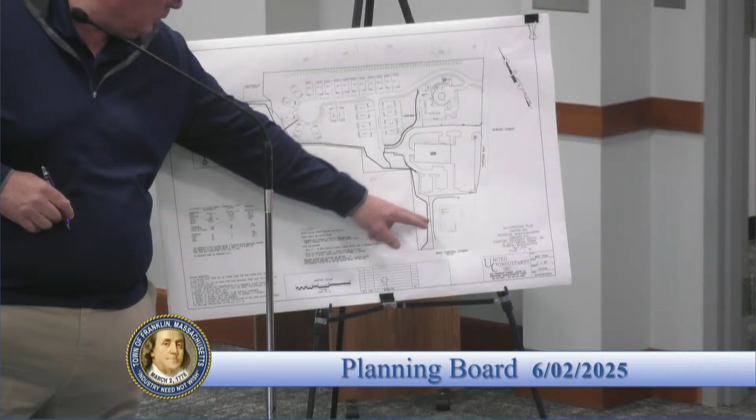But the rest of it, from a surface and grading standpoint, wouldn't provide the same accessibility that a sidewalk provides to seniors or people with a stroller. Or would it be a possibility to eliminate this section of trail and relocate the sidewalk along the street instead?

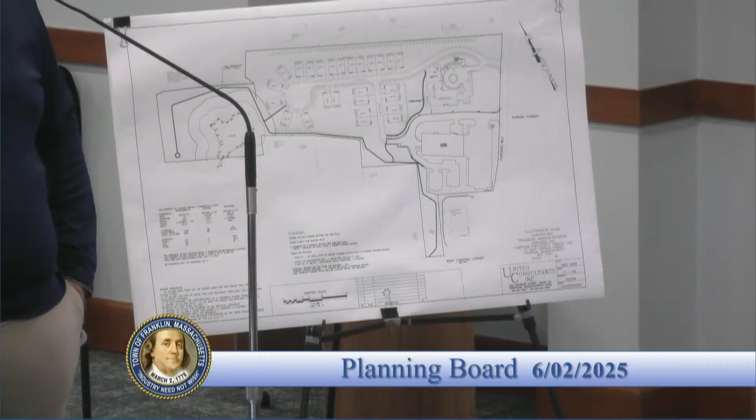I think it's a weight between what the planning board and what's more important - do you want a trail or do you want a sidewalk? Cost-wise for you guys, both would be ideal, right?

I'd like to hear what everyone else is thinking on that one. I can go either way. Jay? So, yeah, I get the sidewalk thing.

Not to get too pedantic about the sidewalk, but as soon as you start messing with the sidewalk over there, as Mike acknowledged, the road is kind of beat up, and you get into what the heck's gonna happen with the road. You might end up with a situation where the road falls apart, or we create a drainage problem we're not currently aware of.

So it's not super easy, and I'd like to, before we put something definitive on the developer, have some level of commitment from the town that there would be a partnership. I was trying to do the math quickly - it's probably like $120,000 to put that sidewalk in. That's a lot of money to just go and pitch at someone without some level of commitment from the municipality, because sidewalks and curbing open cans of worms.

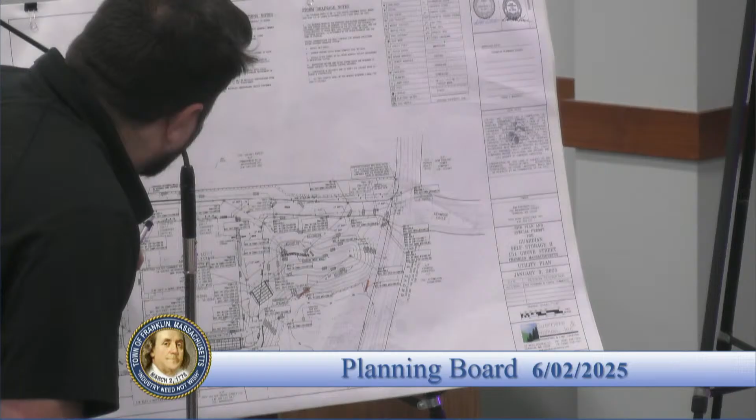And then, we are doing some replanting with conservation seed mixes on side slopes after the fact, so that they'll reestablish themselves as kind of a wooded or non-maintained lawn. It'll be allowed to go back to a natural state.

To that side and to the rear also? Yeah, wherever we can, that doesn't interfere with drainage infrastructure.

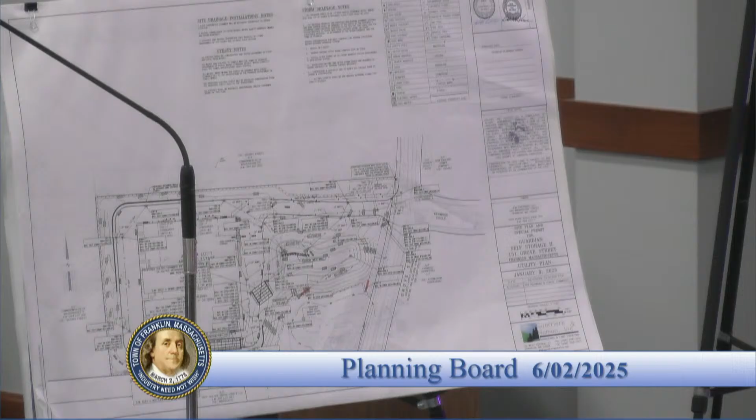All right, thank you. I actually have another question. Mike, if or when the town does sidewalk improvements over there, is it a fair assumption that it's gonna be a continuation of the 8-foot wide bike path? That was the original idea at the time when we were doing that first phase, to eventually extend that all the way up to the intersection of Beaver and eventually get access to Beaver Pond. Yep, that was the grand scheme of things.

Okay, so assuming that's the continuation of that, I'm guessing here, but based on my understanding of the alignment of that roadway, you'll probably have to shift the curb out at this location to accomplish that. Possibly, yeah.

I'm thinking it's gonna go that way, so you're gonna end up narrowing the road, you'll reduce the effective speed on the road, and then it'll actually improve your sight distance situation, so I think this might be a temporary issue. I'm trying to come to some level of comfort with it. I'm usually a pretty big stickler about that one. So having that in the back of our minds, combined with lighting that up, kind of puts me at ease.

Anybody in the audience? Comments, questions? Anybody on, no, none on? Okay.

I concur with the rest of the board, and I do think, I like Jay's idea, the additional light at the entry. I think that'll only help this site as well as across the street. I don't know if there's a street light across the street. I don't think it is. I think it's offset down the street. No, I don't think it's directed. It's not a well-lit intersection. It's probably mostly offset, I would say. And then basically you're taking care of the clearing at the front entry, so I'm okay with that.

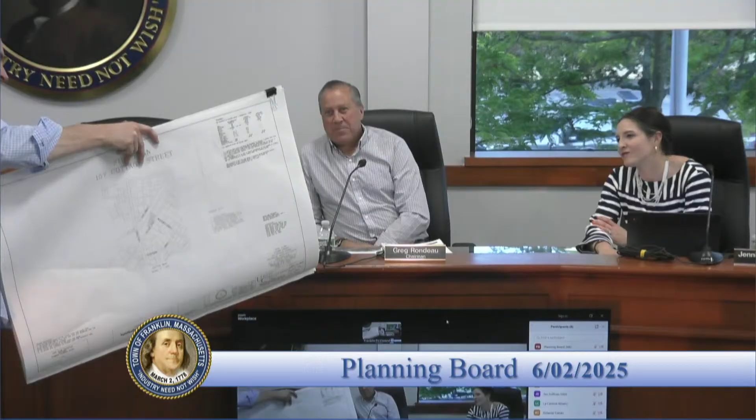So here's the building, there are two poles. On the right side of the building there's an existing pole right across the street. And there's another pole on the left side of the building, right there. If you look at my pictures, this is looking down towards the intersection of Union Street - that's the pole on the left side. And if you flip around the other way, that's the pole that comes across from Manchester Street.

So it's not proposing any new poles, those are two pre-existing poles, basically on the left and right side.

I went out there and measured everything with a foot candle meter. At the bottom of the poles there's about 0.9 or 1 foot candle, and it spreads out toward the middle. Anything on this plan that's spilling out, worst case, is 0.3 to 0.4 right at the middle. All the other stuff is 0.1, so that spillage is way less than the existing spillage.

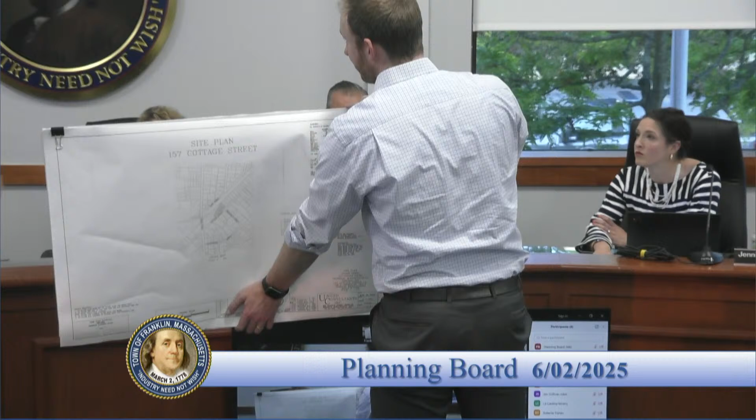Point out where your nearest residence is. There's one here which gets no light spillage whatsoever, and the other is just across the street. You can tell it's very dark - even the light poles don't make it across the street. There's a house here and a house here, so nothing's affected there.

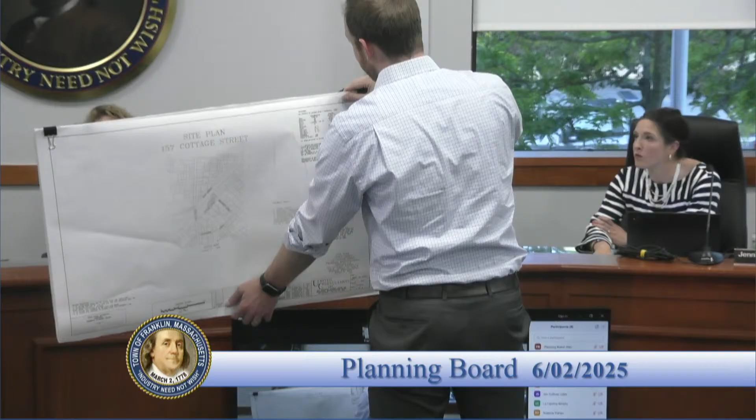My question would be - sorry, I can't see the audience from here - are the two abutters across the street here by chance? No? Is there any abutter here, please?

No concern for the lighting on their part, if they're existing, and now would be the time to fix it if it's an annoying factor. It's very bright with those light poles.

No meters on them, National Grid or Eversource? I would imagine the town probably controls the pad. The DPW controls the actual street lighting - we own, on most poles, the actual street lights.

Are you going to use downward firing fixtures on your site? These are all building wall mounts, so in reality we could even adjust them, put lenses on - there's no poles. So if it really becomes an issue, we could just use hooded or down firing lights.

I would say to make sure that plan gets into the submission of the drawings - official meter readings, foot candles, we do the same stuff, so we know where it came from in the picture. The only thing is now they're going to ask me every time I come in here, but I should do the same with my graphics.

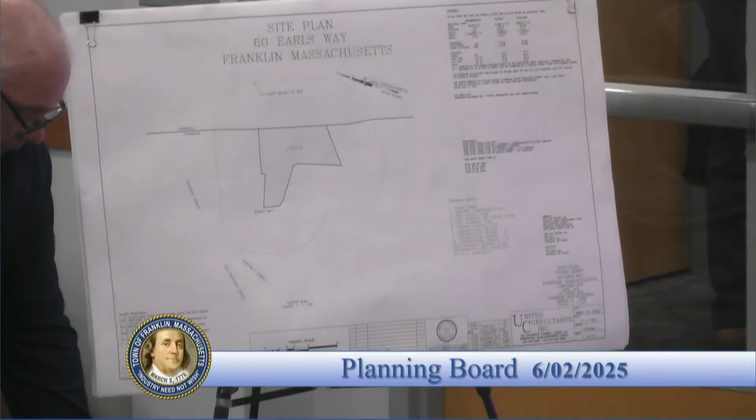Sure, Rick Goodrow with United Consultants. We do have an architectural rendering of the plan view of the site, so you can get a feel for the site layout with the building and parking areas. I also have a rendering of the front of what we're calling the front of the building, just to give the board an idea of the building itself.

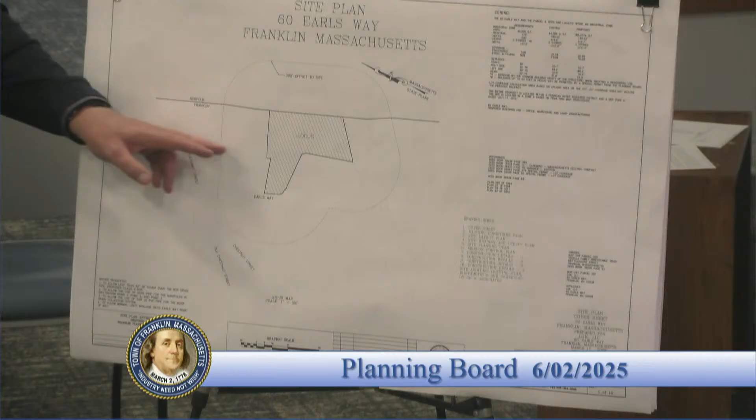I would hope most of the board members are aware of the location of Earls Way. Currently, there are buildings located on Earls Way. 60 Earls Way is owned by the Dos Santos family, Simon's family owns the property to the south, and Little Tully LLC owns the building to the north. The Vozella family owns the property to the east, or plan north, if you will. The idea is to cut out the back section of the property here for development of the new building.

So what this plan outlines is the existing building located on 60 Earls Way, two abutting buildings located here, access driveway coming in, building located in this area here, parking spaces and access aisles in the front portion of the building. Again, this view is what you're seeing here, which would be seen from the Earls Way side.

Loading area for the business would be located on the right side of the plan, or the south of the property. Additional parking and some door entrances located here and here to provide access into other areas of the building. Some additional parking and an access driveway with 360-degree access around the building has been provided.

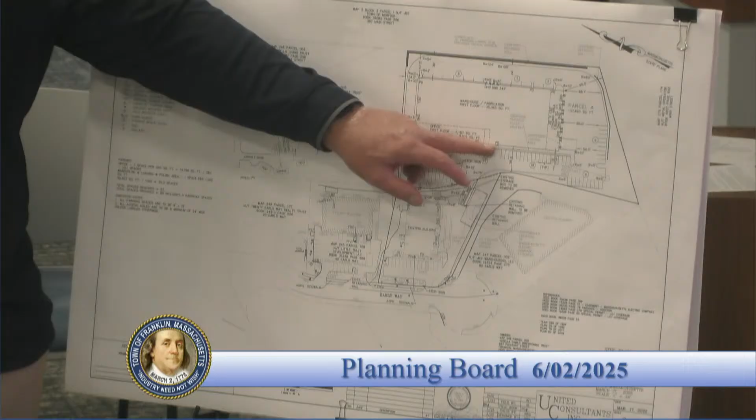Mr. Dos Santos and myself did meet with the deputy fire chief. He did request one additional hydrant be located to the rear of the building, which we added. And we do have a second hydrant located here that he was happy with. We showed him the circulation of the town's fire truck through the site. He was comfortable with that. We understand we don't have a letter from him, but we do expect that would be forthcoming.

We've been focusing on Panther Way with the deputy fire chief, and I believe these letters will be coming out as we move forward into this permitting process. So that's a brief overview of the project. I could get into more detail on some of the utilities, the stormwater, but I think that's more something you'll allow Beta to take care of. But that's a brief overview of the project. Happy to answer any questions the board may have.

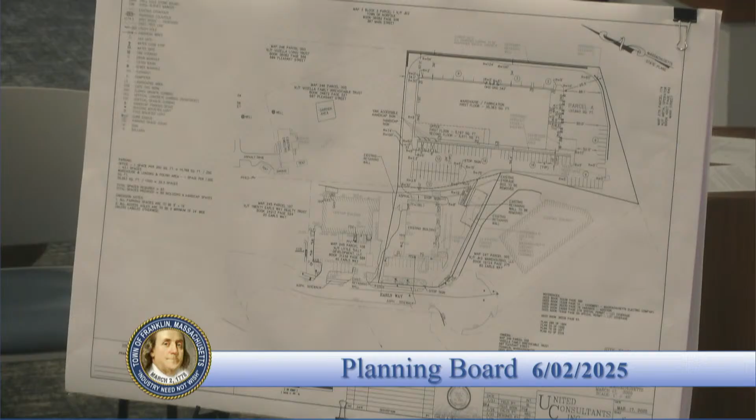Good, thank you. I'll go to Jen. Jen, comments, questions? This is just initial, brief. It abuts the tracks, right, to the plan east? That's correct. There's quite a grade change from the site to where the track location is. I guess, per usual, my concern is clear cutting an entire forest for this to happen, but that's all I have for now.

Okay, Jen, comments, questions? I'd like a little bit more information from Beta before I have any comments, but your layout, you've taken into consideration your abutting properties, you are in an industrial area. I guess circulation within the site, you've talked to the fire chief. Plantings - do you have a planting plan in here? Yes, there it is, I see it.